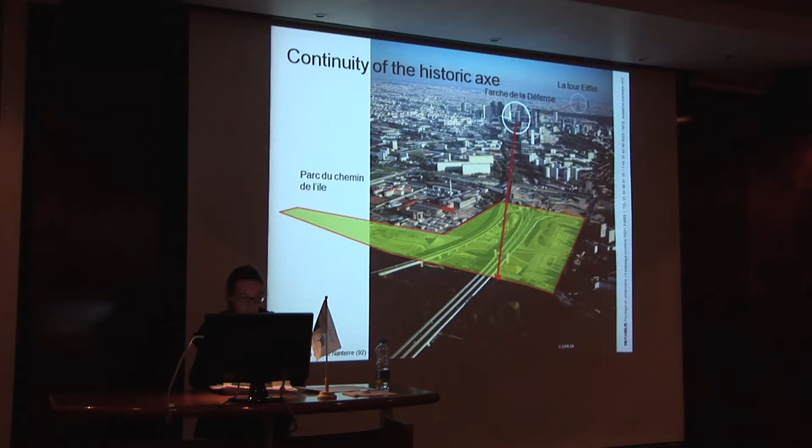So here is the urban situation between Nanterre, La Défense here, Carrières-sur-Seine here, and the park is just in front of the Seine, with this island called L'Île Fleurie, meaning the flower island, which is a faunistic reserve.

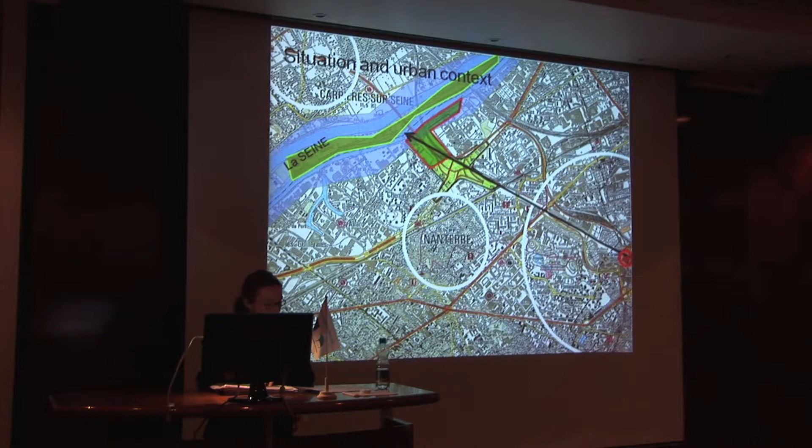From the beginning, we decided to reveal the industrial spirit of this site because in a way we couldn't fight against it. So just having a look, you can see the big structures of transport. You have here the highway, here the RER train way. You have also here the paper industry, here a big jail. So everything was perfect - I mean it was simple to have a park there, and we were in the middle of nowhere.

But fortunately, we also had this small part of Nanterre, a small suburb of Nanterre, with its typical houses from there.

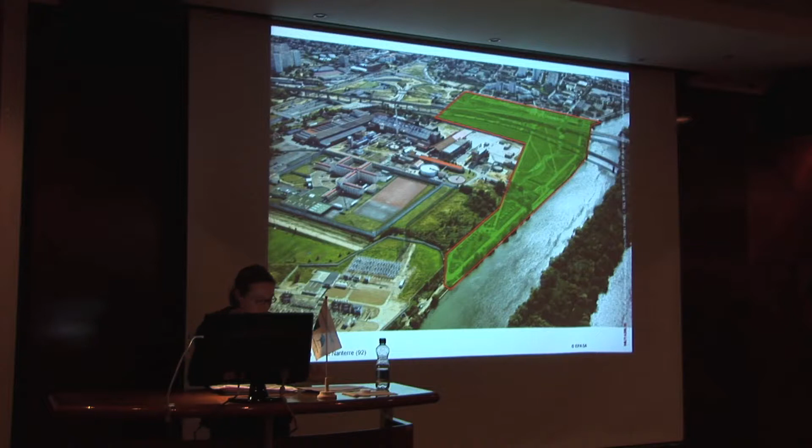Okay. Here's the master plan. We won this project because of its clear goal, which was to reveal, to restore, and to amplify the rapport between La Seine and its urban context.

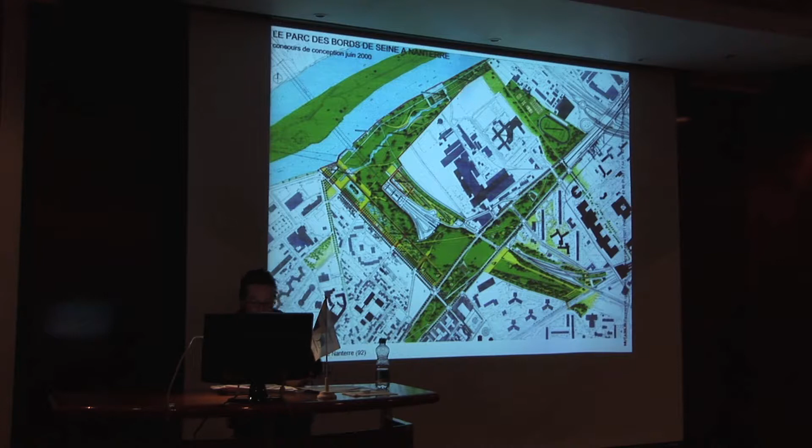So the main system is the water system. We played with it as several means: participate to improve the flooding condition, restore the quality of water coming from La Seine for different spaces, different ambiences of the park, explain and show how to restore water with plants, how we can filter it with plants, and explain and show how to create havens around this resource.

So let me explain the system. We are pumping water from La Seine here, with those five worm gears, des vis d'Archimède, I don't know if you know this term. And then water goes down to the water gardens, everything is with gravity after that. So it's filtered here, and then you begin to have pleasure gardens where the clearer the water is, the more accessible to the visitor it is. So those water gardens are useful, pleasant and educative.

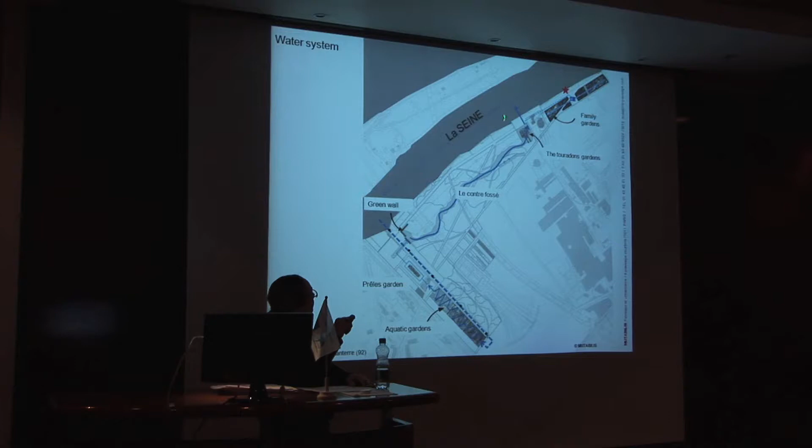And third, we have this tree where the water is going back to La Seine, through wide meadows and natural treatment. So this is the last point. The water is going back to La Seine. This last part, I will explain it to you after. It's how we took again this resource to use it in the family gardens.

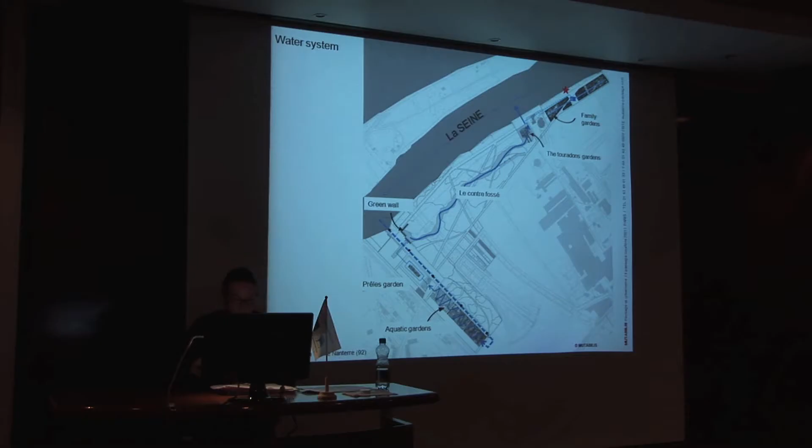Many events are animating the park. For example, the house restaurant here, where you have an info point, exhibitions, a small bar. You have also many playgrounds all around this axis, on those parts also. You have a paddock and a house for horse guard, a big technical site. And as I said, family gardens at the end of the park.

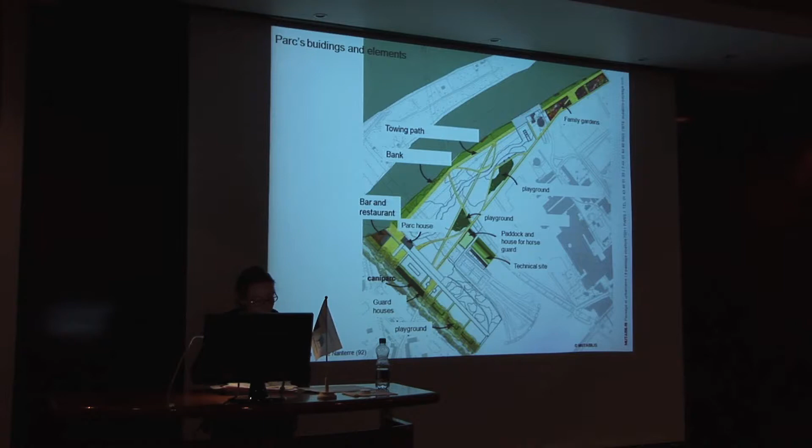So first I explain the architectural part here, and then along the Seine, more natural treatment. Here is the urban front with the small houses I was talking about. We designed the project like a real architecture, with its own writings. I mean, water gardens, fences, benches. We designed everything. Here's the water gardens with the walls, special walls in concrete and special treatment. Fences with the playground just behind, as you can see.

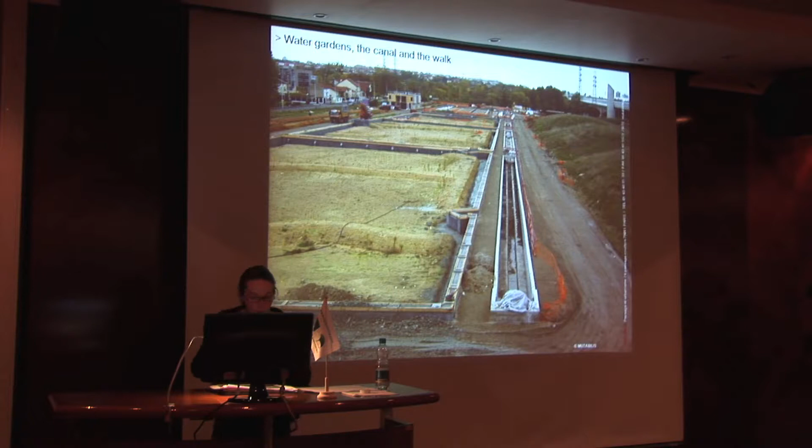And here you have the structure of the water garden with the line of worm gears pumping, so the Seine is on the back, pumping water here, it's during the works, as you can see. And the water is going like this, with gravity through the water gardens. The first and the last worm gear. And here is the water gardens nowadays. As you can see, the park is useful, but became a real source of promenade and a pleasure park.

The context at the beginning, which seemed to be really hard, became much more natural and pleasant at the end, in continuity with the flora and island. And it became at last a place where you make the choice to go. People are rediscovering fauna and flora, and we also have something special because the maintenance needs to move and to cut down the big tanks filled with water. So it's changing the water garden's proportion completely.

In this case, water was the driving force of the project and also a tool to educate and inform people about the surroundings. You can see on this picture the indicator plants, which means that water is of good quality now. So here is the Jardin des Prés. I didn't know how to translate it, I'm sorry. The water is clear at this moment. We work on different ambiences, sometimes really open, sometimes more intimate. And you can touch the water at that moment when it's clear.

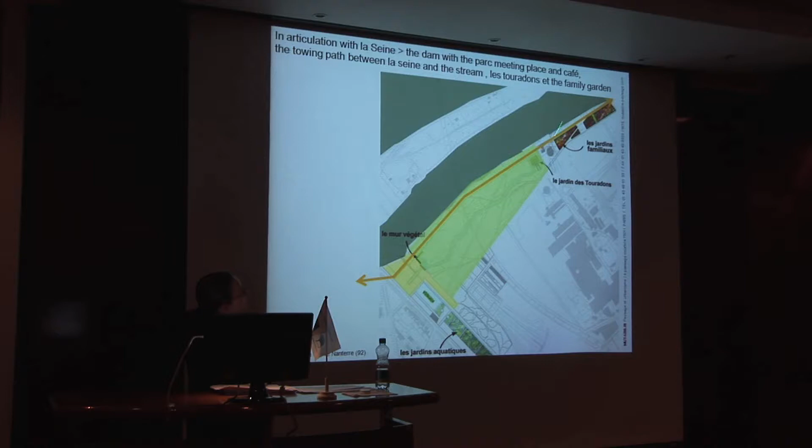The towing path is the open space of the park. It is in complete continuity with the rest of the Seine. It's between La Seine and what we call the stream. And the park is finishing, as I said, around there. Open on the wide meadows.

I talked about the park meeting place and cafe info point. Here it is. We created the last event with the water. Here it's like a kind of green wall with water going through it. And then the beginning of the stream here, which is really, really natural. Creating this park, we wanted to double, in fact, the promenade along the water, just as if the Seine was going inside of the park.

This park also has a role to play when the Seine is flooding. It seems to be weak and small, and when the Seine is flooding, it's so huge that you think maybe it's a waste to think that we can accept water and participate to manage flooding events. But we think that every small piece of project along the Seine has to participate to the whole, in fact, and to this event.

Here's the stream. We worked with an artist, as you can see, those pieces are just like big, huge animals coming from the earth that we rediscovered. So all this part can be covered by water.

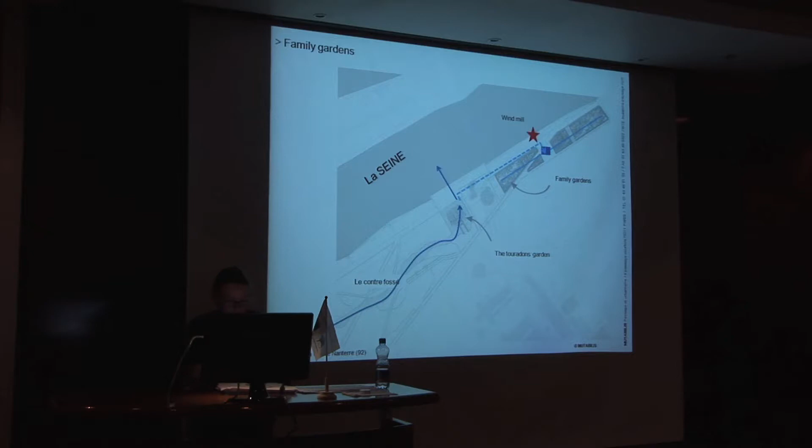Here's the reservoir, which is a central place in the family garden site. This is during works. So you can see the small canal and the tank for every garden. The gardens now work.

So we are happy with this project because we succeeded in showing and creating events with water everywhere in the park. It became a real pleasure park, and people seem to like to go in it. We also succeeded in going near La Seine, but as Chirac wanted at the moment, that's too bad, but we can't swim in the Seine for the moment. But maybe thanks to the park one day we'll.

I wanted to show you some pictures about the earthwork, because when we started this project, we thought we were in what we called Poubellien supérieur, meaning a kind of garbage soil, as you can see. And fortunately, finally, we exploited everything we could. So we selected and crushed the concrete, and we made all the pedestrian ways with this crushed concrete.

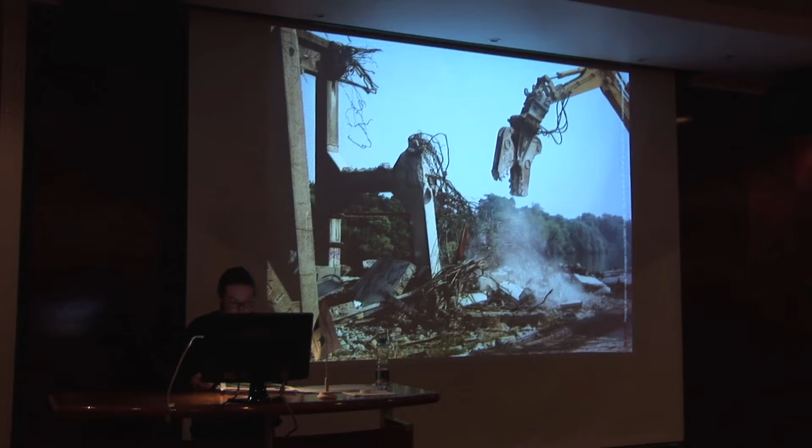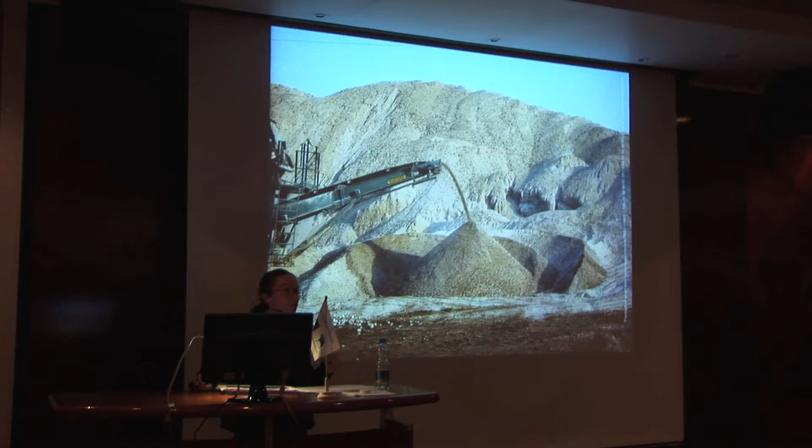We found a big site of sand and clay in the soil, so it was a good surprise for us. All the concrete was also given to some projects in the area, so we won money with this project. The vegetation was found to protect the new plantations. It was a miracle for us to find sand and clay because we use it for the stream. Here it is. You can see under this you have the clay, and on it we put the sand to protect the l'étanchéité.

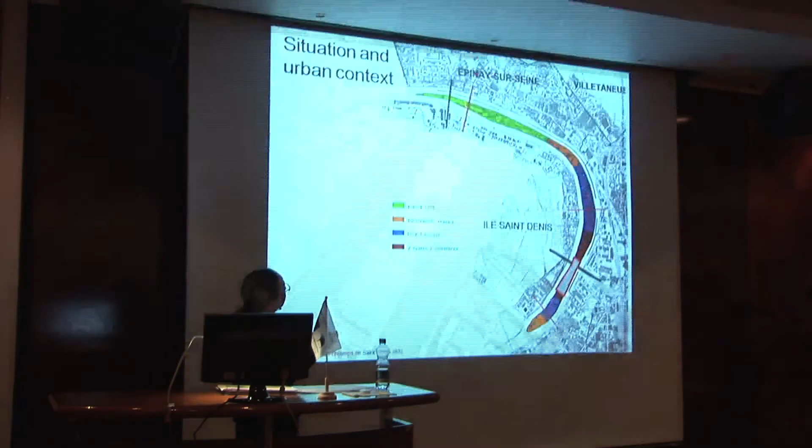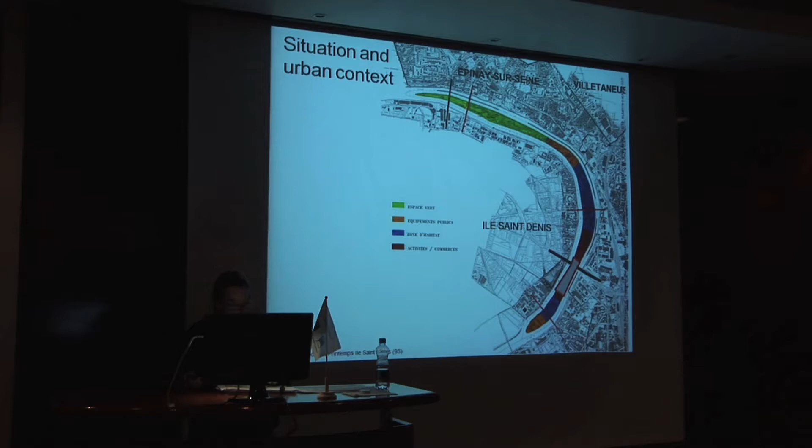Here's the site. It's a perfect representation of monospecificity. It's full of buildings, stock material, parking and so on. The buildings took all the place, as you can see here, and it's like a boat, you know. And the banks of the river were completely wasted.

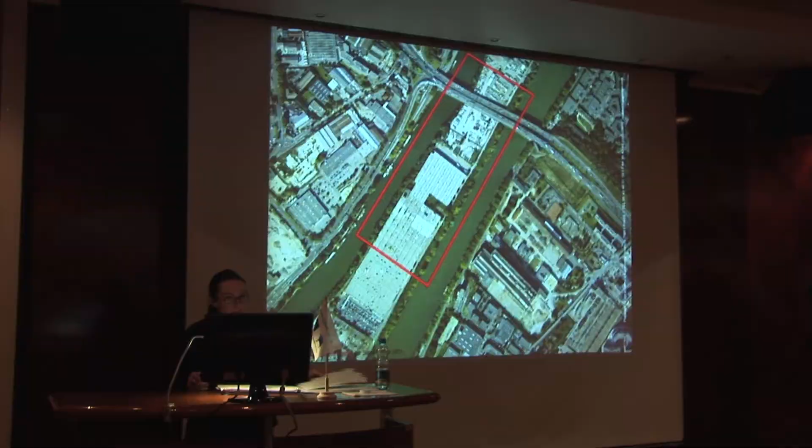So the object of the competition was to create a living neighborhood with activity and houses. First of all, for us, the most important was to find again the island, to restore biodiversity, and to give a frame to this stripe. From the idea of the island, we designed islands in it for many reasons, because we created a new topography to approach the water and to develop a build-up on the small arm here.

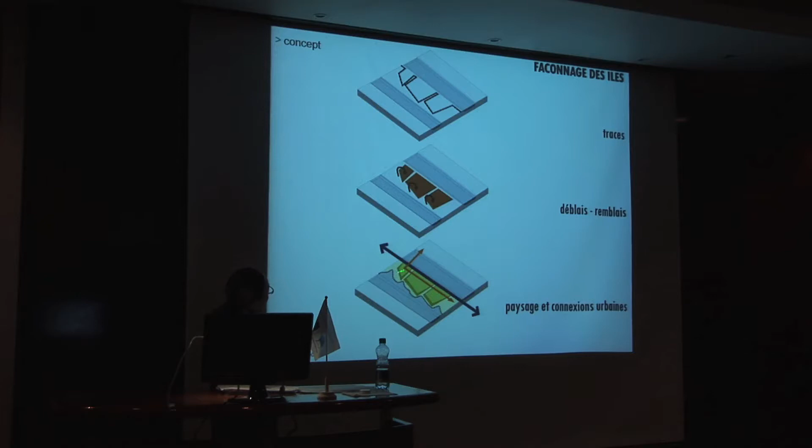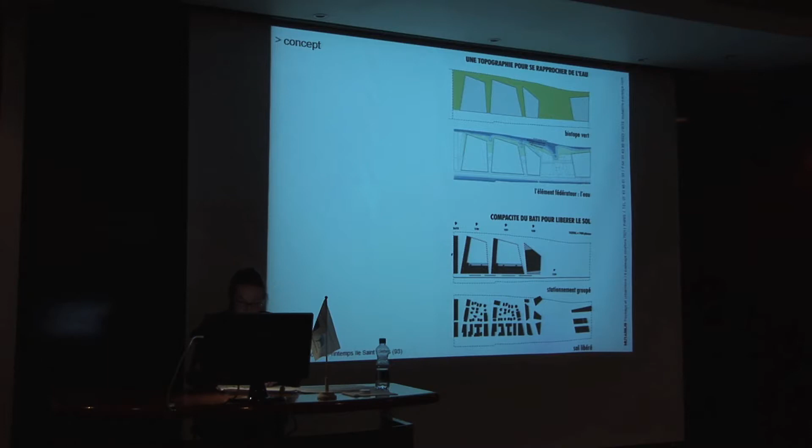So you can see that it's a chance for the water to go into the island. You can see those islands I was talking about where we can live. And we also worked on the compactness of houses and buildings in those small islands. The system works in two ways. It means the water can come in at flooding time. It comes into what we call les micro-vallons, meaning the micro-valleys, small valleys.

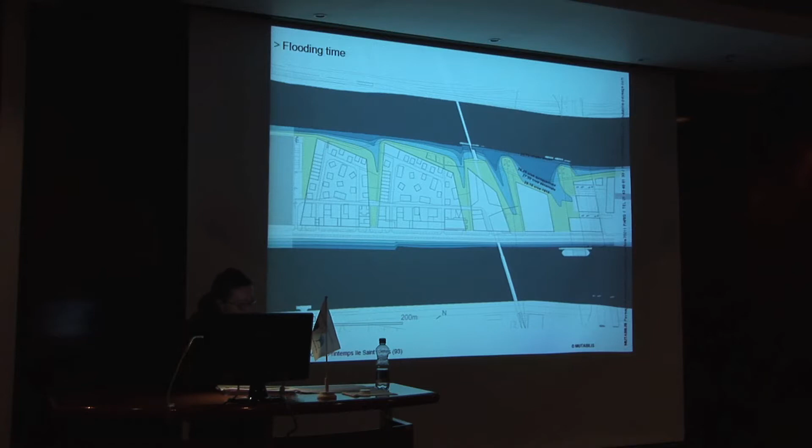And also, in everyday time, those micro-vallons are useful to filter and to take all the water of the project back to La Seine after being filtered.

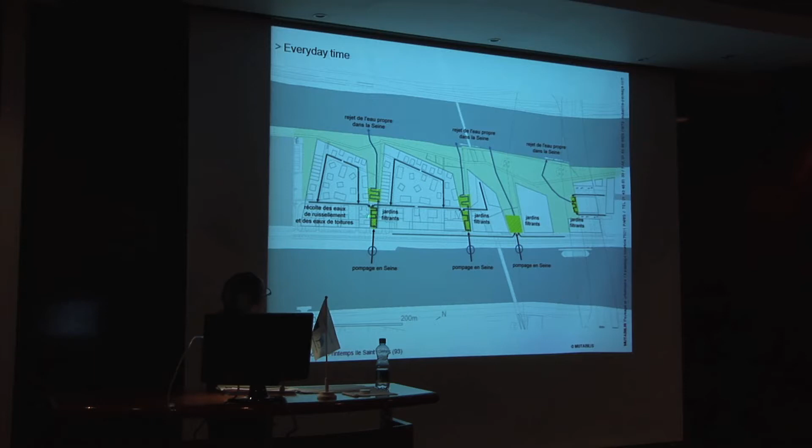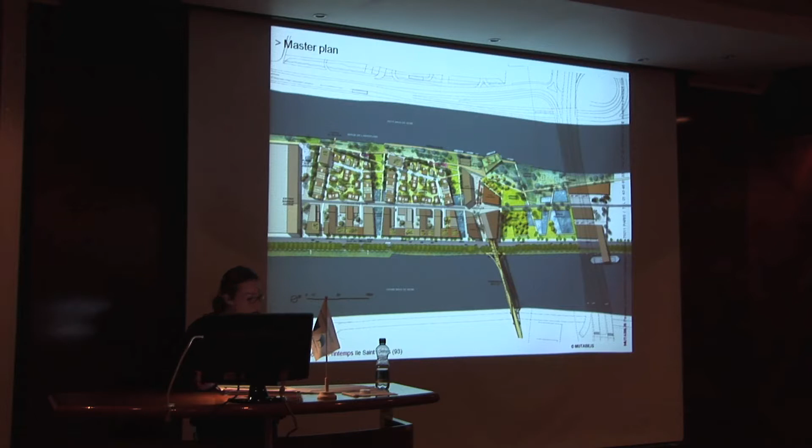The master plan is simple, and as you can see, we composed things with a dissymmetry. Here is the small arm I was talking about, where you have only pedestrian paths and very natural sites, and we kept this road, which is the main road of the island, and guarantee continuity of the island. It's a more urban face. In section, as I said, we can, from this point, thanks to Les Micro-Vallons, see the small arm and the big arm.

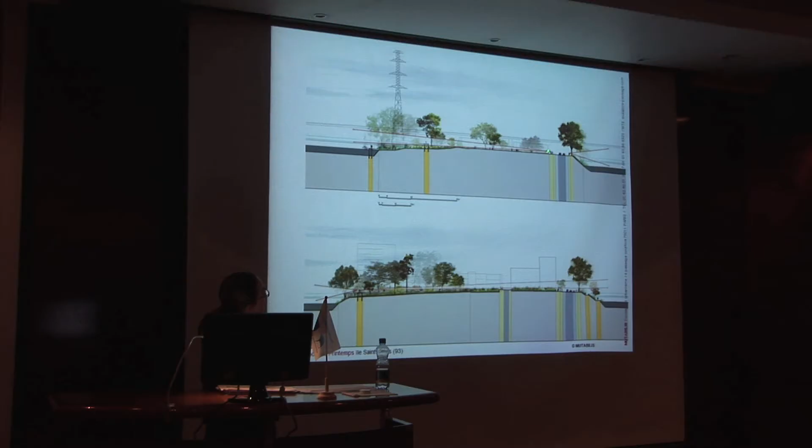This project was won some years ago, but we don't know if we will continue with it. I hope so, because I think we'll have a chance to have a nice project for people there.

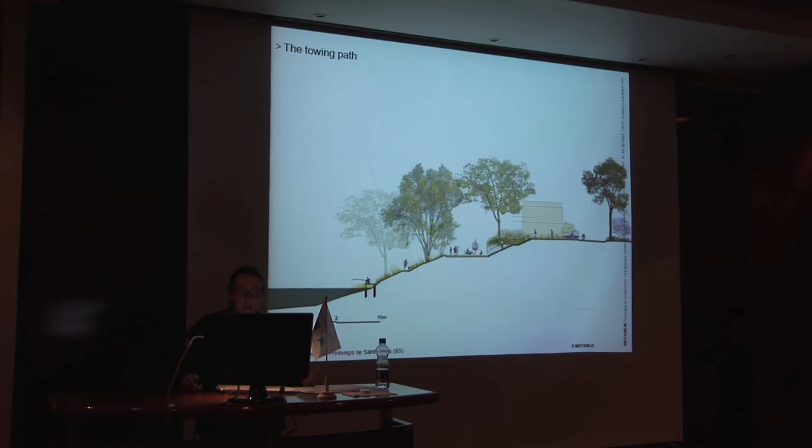The towing path on the small arm. This towing path is also a place to rest, to go and fish in the Petit Bras de la Seine, to have playgrounds. This is the open spaces with wide meadows and filtering gardens. This section is interesting because it shows the upper flooding level. Here it's 1910, and we take this level to fix our towing path.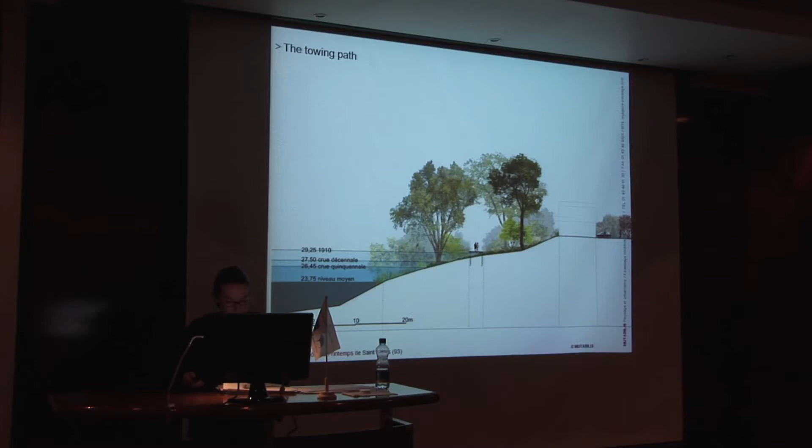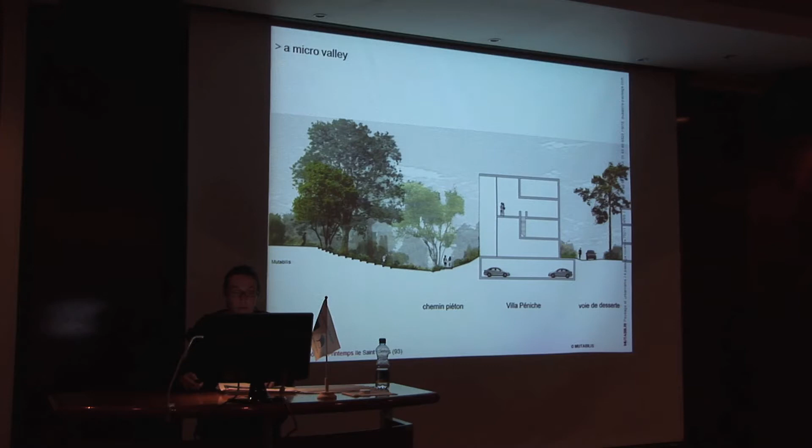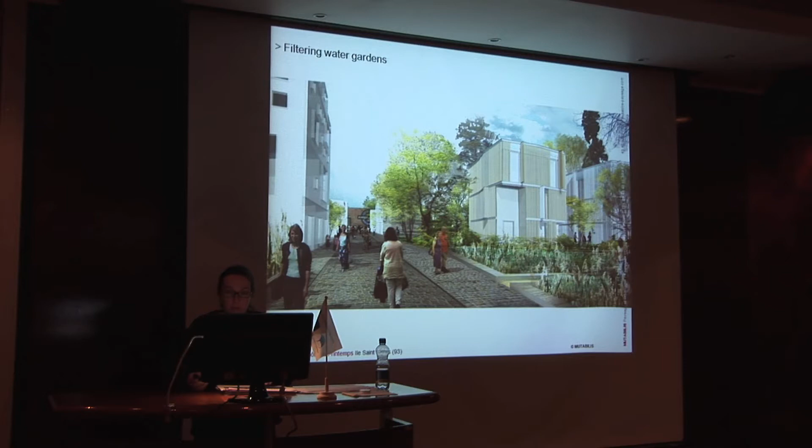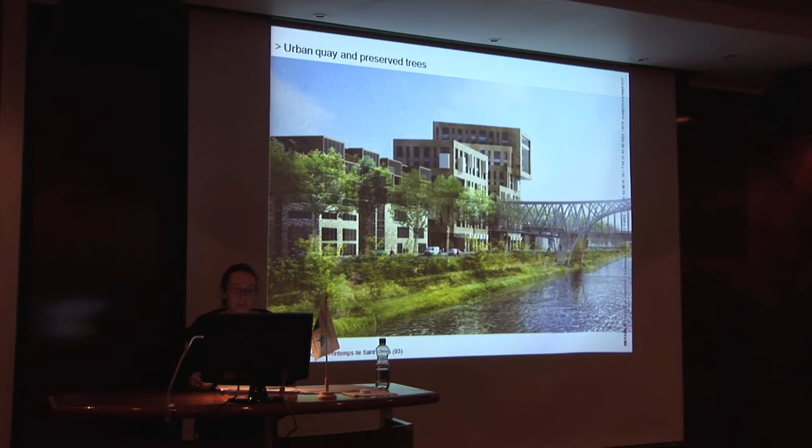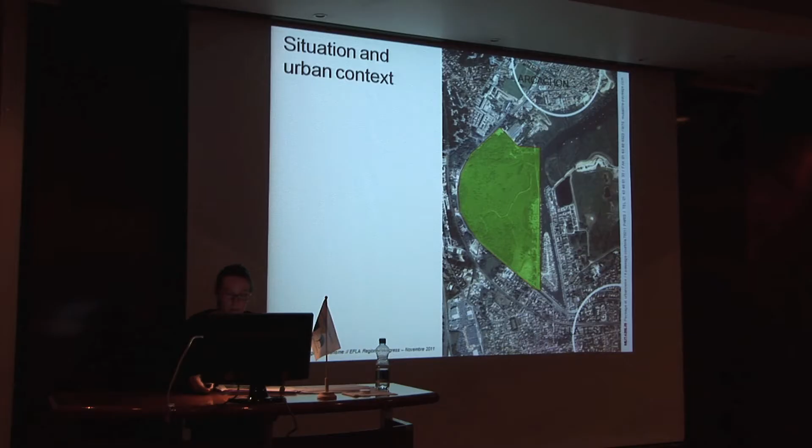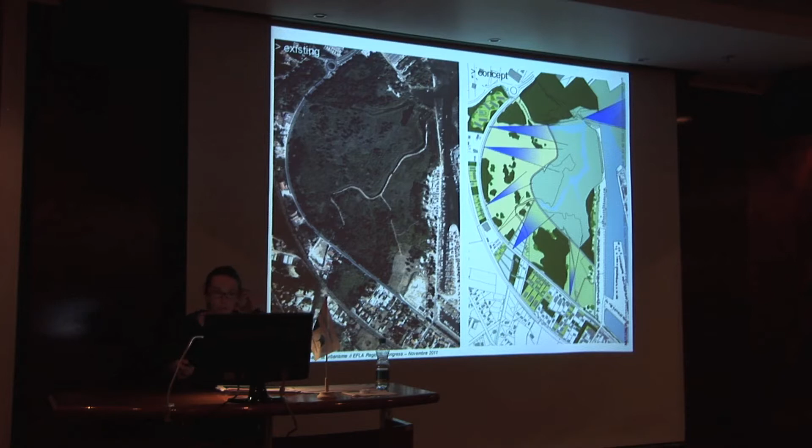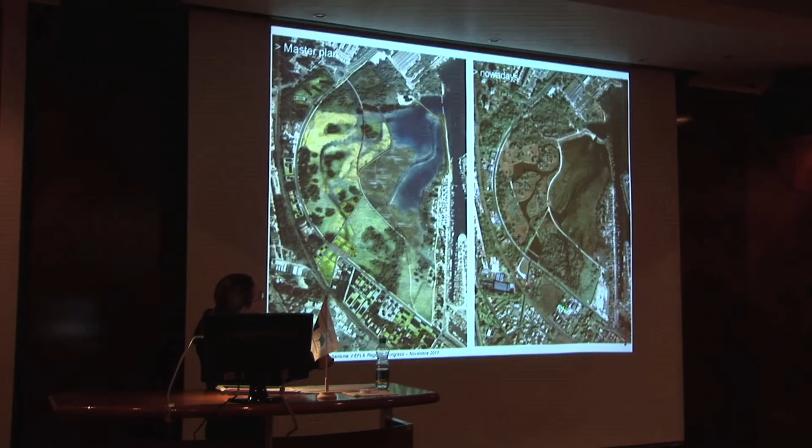So those two references guide us, and we decided to work really simply in that territory. We wanted just to make people cross it and have views on the sea. The existing is like this, so we wanted from the main road to have views on the sea. This is the part we wanted to give back to shores, and this one is more a place to discover fauna and flora specific to the site. The master plan during the competition, and nowadays it's like this on Google. The competition views, so really the idea was to find again the water and the sea.

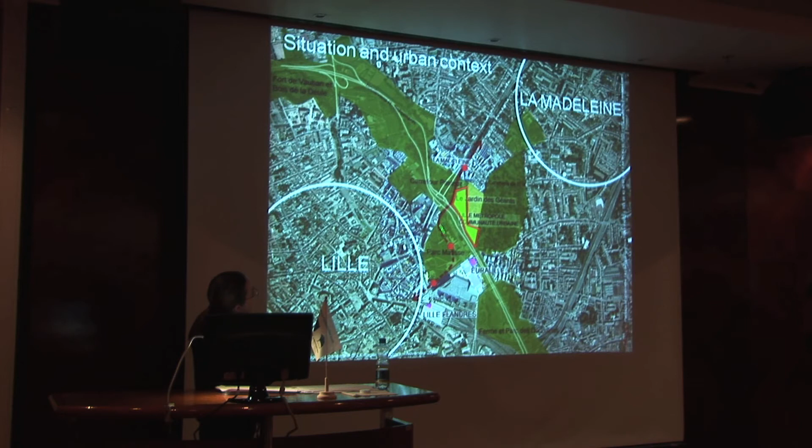Here is the site when we visited for the competition. Terrible. It was so terrible that we had to invent a story. So we were supposed to make a jardin d'émotion et d'exception, which means emotional gardens and exceptional gardens. It was the objective of the project. How to make it exceptional with this?

So we decided to keep the only thing we could, meaning the trees, like this one, those ones. And we invented the story: we took the North tradition with the giants. This tradition is that every city of the north of France has a giant to protect them. So we said that the giant wanted to come back to this site and find what the site was at the origin, meaning before everything it was swamp. So to find water back in the landscape and in the park, in the design project.

So here is the master plan from the competition. You have 3 parts. The first is what we decided to keep open to the town because it's a pedestrian path. This one is enclosed and is the heart of the project. The enclosed part has 2 parts. In fact, you have this one called l'herbe des géants, which is full of plants that make you forget that you have a highway just behind. And the second part is where water is refound, with ponds and water gardens.

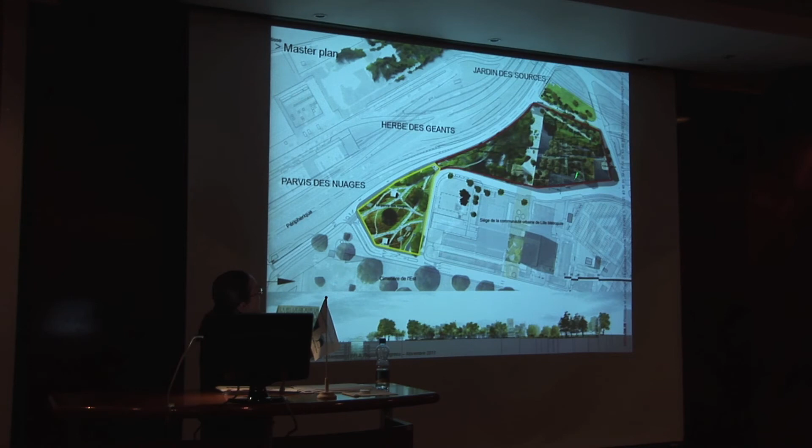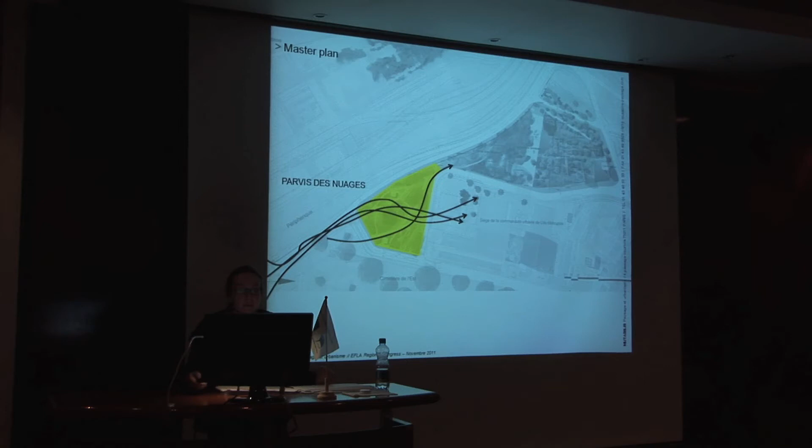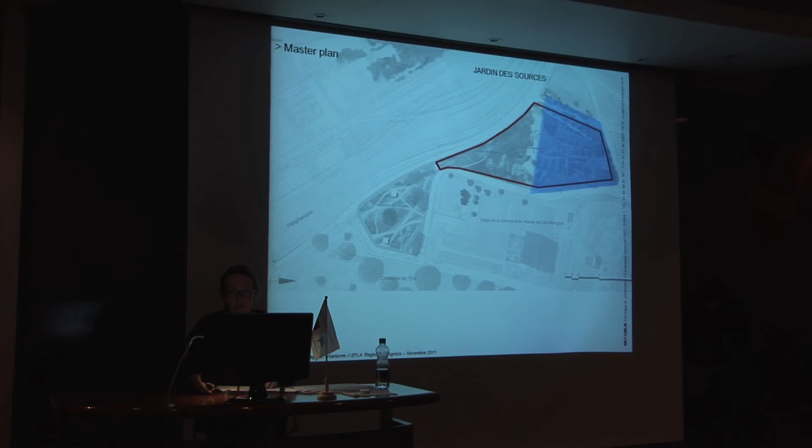So first part, pedestrian, and keeping the pedestrian, I'm sorry for the English. Second part, l'herbe des géants, and the third one, le jardin des sources. Water is working like this in the project. We're pumping water from here in the ground. With the first water garden, we're filtering it, and then it's going like this in ponds. And the last point is that we take it at the upper point, and then it's going by gravity. So when we finished pumping and having all this working, it's completely autonomous.

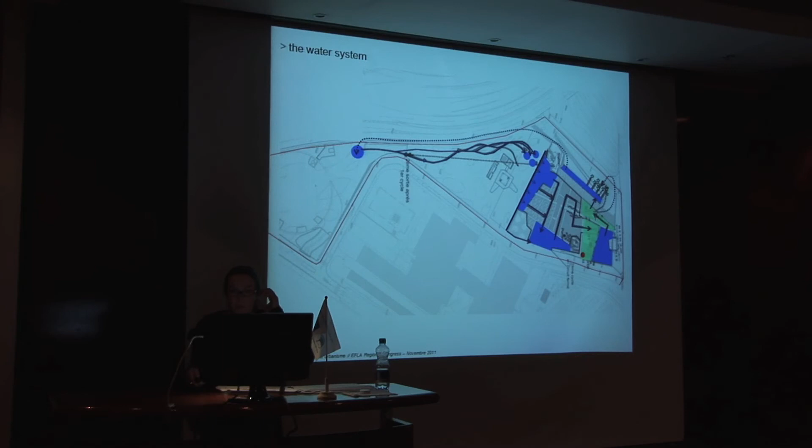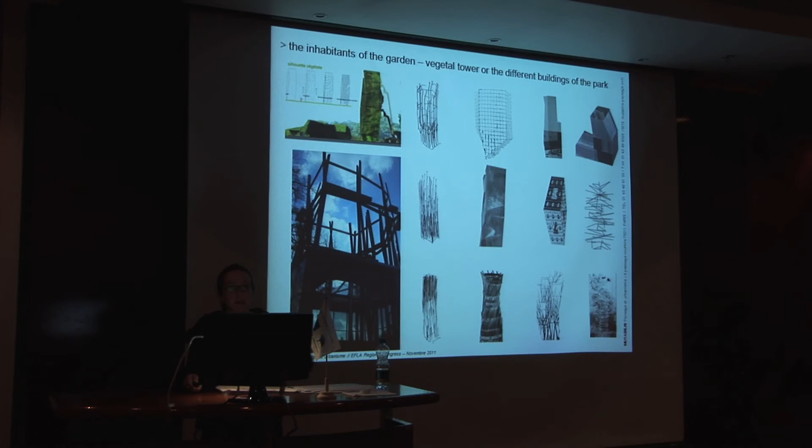Those giants, we call them the inhabitants of the garden. We thought of Italian references, like Bomarzo, like Villa d'Este, and the last one, the small one here, I think it's in Iceland. And we invented everything, saying, okay, buildings are giants also. All the small buildings and edifices in the park have to be high and recognizable. We had also willow heads, like a giant coming out from the space and the ground.

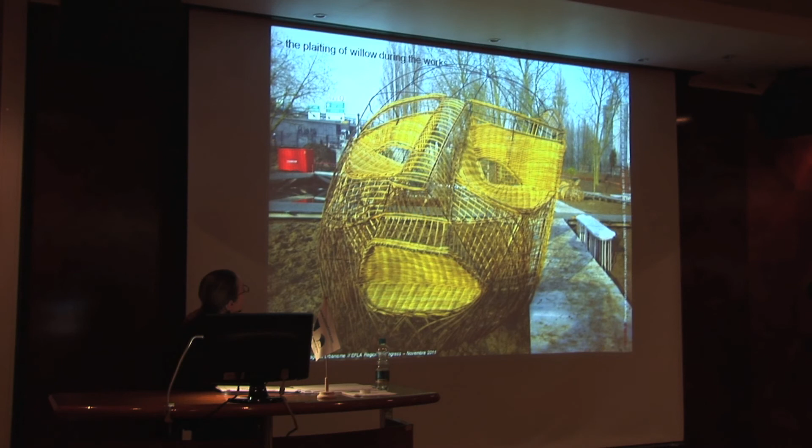Here is the work we had with the artist who made things with willow. You will see, here it is. Again. And from the parking, the giant went out. We had also big work with another artist, working with steel. We called it animal fountains, les têtes cracheuses, in fact. There it is, doing the work.

Everything is huge. Giants are huge, so it's a special scale for the garden. The garden is small, it's less than 3 hectares. And everything is huge in it, during the work. The giants in the North traditions are human persons, or animals, or even plants. And we thought also that the giant, to find the water, has to be a water diviner, with divining rods, les bâtons de sourcier, and it helped us to bring the identity of the site, and the fences were designed with this baguette de sourcier.

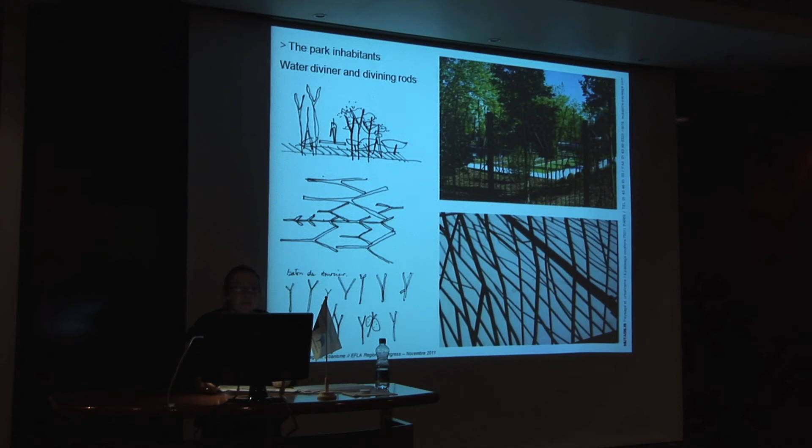Here's the pedestrian path. It's the first open place of the garden. It's just in front of Euralille. It's a nice place. You have a big view on Euralille. You can see just over there the highway, and now everybody forgot the highway. Before it was so noisy, terrible, and now it's pleasant and seems to be a calm place. L'herbe des géants, everything is in bamboo. The full planting was necessary to cut off the highway.

These are the small lines of water going back to the ponds with gravity. It's just like a delta, the pedestrian path, and also the small lines of water. Just like water with a delta. Here it's l'esplanade, it's the most important open place in the site, with the restaurant.